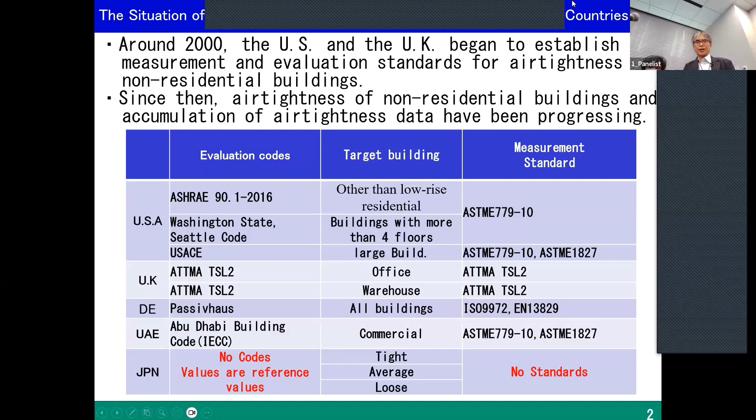Around 2000, the US and the UK began to establish measurement and evaluation standards for airtightness in non-residential buildings. Since then, airtightness of non-residential buildings and the accumulation of airtightness data have been progressing. In Japan, airtightness of high-rise buildings was measured in the 1980s, and reference values for airtightness were presented. However, no progress has been made since then.

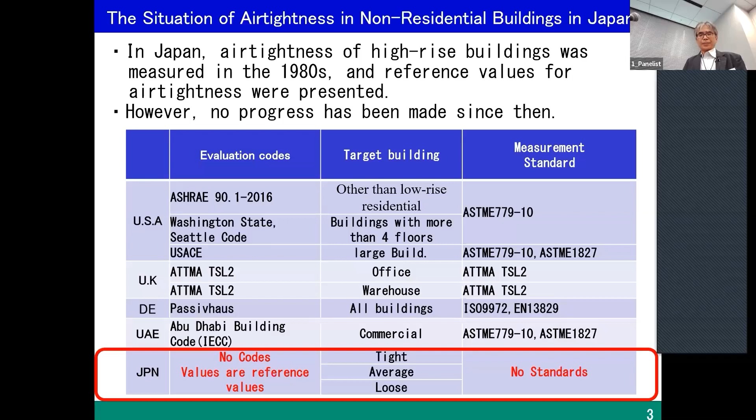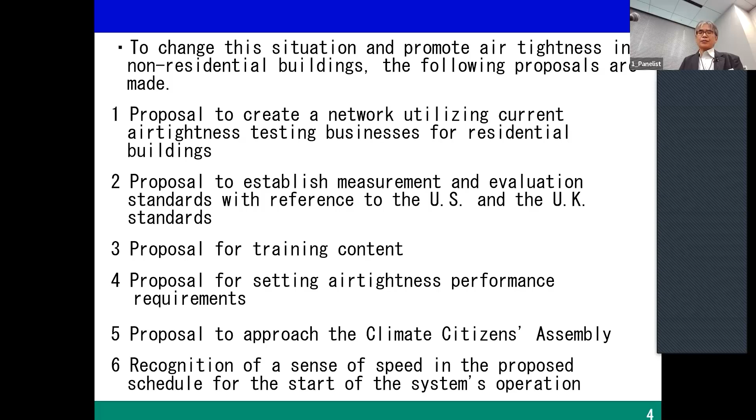To change this situation and promote airtightness in non-residential buildings, the following proposals are made. First, a proposal to create a network utilizing current airtightness testing businesses for residential buildings. Second, a proposal to establish measurement and evaluation standards with reference to the UK and US standards. Third, a proposal for training content. Fourth, a proposal for setting airtightness performance requirements. Fifth, a proposal to approach the Climate Citizens' Assembly. Sixth, recognition of sense of speed in the proposed schedule for the start of the system's operation.

First, I explain the proposal to create a network utilizing current airtightness testing businesses for residential buildings. In Japan, IBECs is an association that provides training, testing, and certification for airtightness testing of residential buildings. IBECs is an organization affiliated with the Ministry of Land, Infrastructure, Transport, and Tourism. Business operators are registered after training and passing the JIS A2201 airtightness performance test method for houses using a blower door course. About 1,100 business offices are registered nationwide.

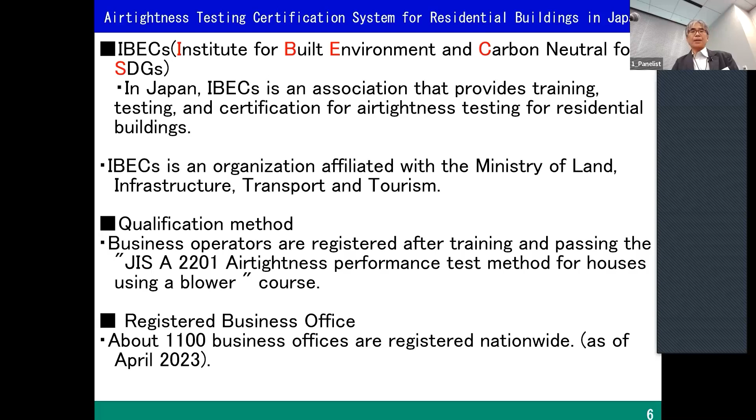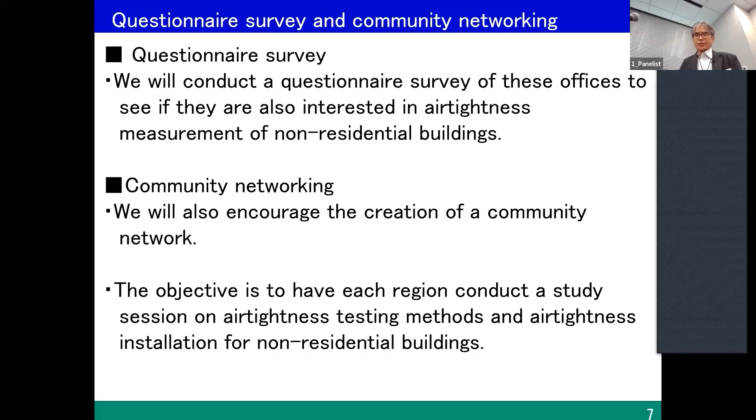We will conduct a questionnaire survey of these offices to see if they are also interested in airtightness measurement of non-residential buildings. We will also encourage the creation of a community network. The objective is to have each region conduct a study session on airtightness testing method and airtightness installation for non-residential buildings, and to have them take on the role of spreading information to local residents. In addition, since airtightness testing equipment is very expensive for large buildings, it is necessary to consider a system in which multiple businesses in a region can take measurements together.

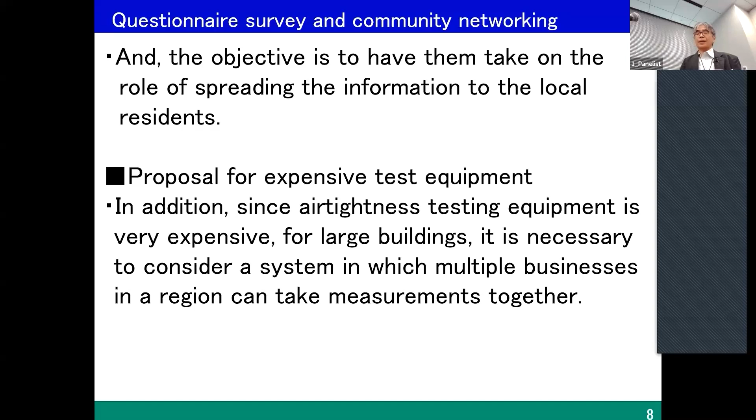Second, I explain the proposal to establish measurement and evaluation standards with reference to the US and UK standards. In the US, ASTM standards have been developed for a variety of airtightness-related content. The 16 standards listed in the table below cover areas of field and laboratory airtightness test methods, materials, and commissioning.

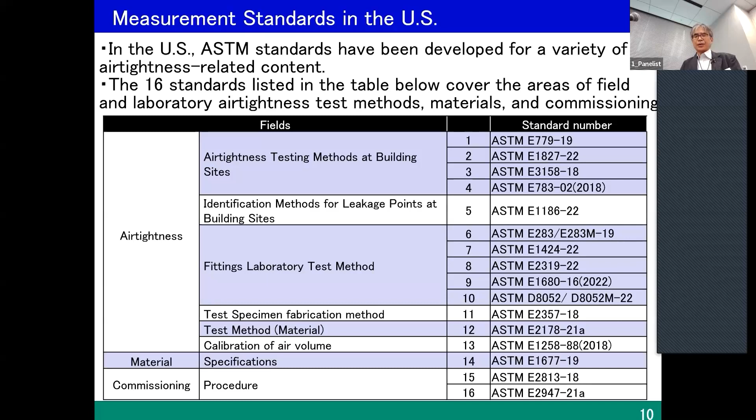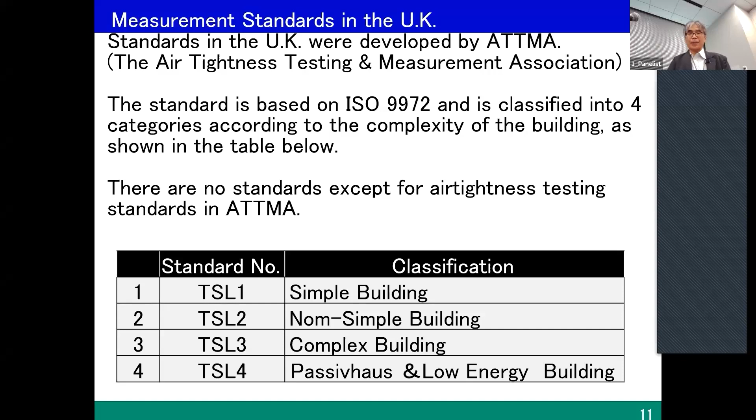In Japan, there are no standards for airtightness testing of non-residential buildings at present. The JIS A2201 is a modified version of ISO 9972 for Japanese residential buildings. The A1516 is a laboratory airtightness test method for fittings. The B9330 is the standard for calibration method for general fan airflow.

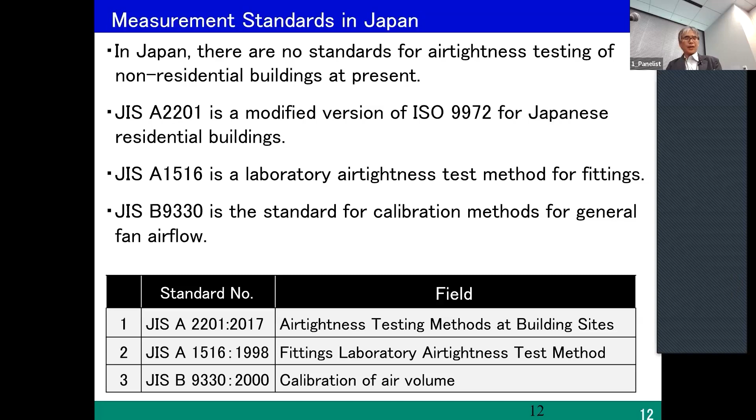In Japan, there is a need to establish measurement and evaluation standards as soon as possible. In order to respond quickly, it is acceptable to initially introduce foreign standards basically as they are; modification will be made as necessary. A candidate for standards would be ATTMA, which is simpler and explains specific procedures. ATTMA is based on ISO 9972, which is the same as JIS A2201. The ATTMA evaluation standards are defined for each building type.

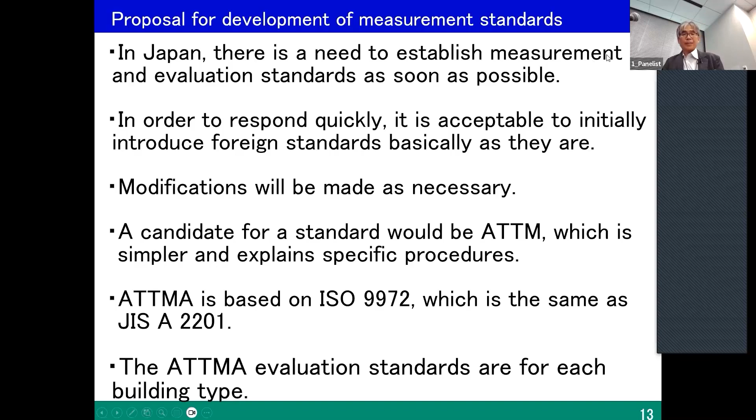In Japan, there is currently no accumulated data, so the same evaluation standards should be adopted as in the US. Standards for materials and commissioning should be supplemented with those of ASTM. The set pressure should be set from 50 Pascal to 75 Pascal in a stepwise manner, taking into consideration the number of test equipment required.

The USACE 2012 wind-unaffected method should be adopted. For the purpose of dissemination, a pattern in which the ventilation openings are not closed should be adopted as the basis in order to reduce labor and cost.

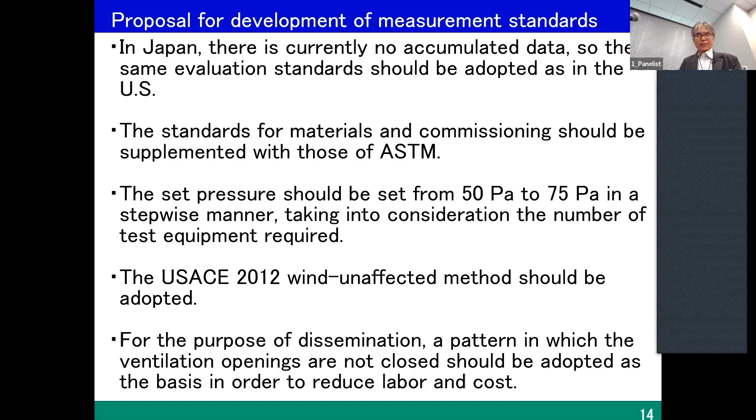Next, I explain airtightness class for fittings. Japanese fitting standards JIS A1516 and ASHRAE IES standards for airtightness performance are compared. Japanese standards are classified as A1 to A4. The standards are A2 or lower for general buildings and A3 for soundproofing, thermal insulation, and dustproofing buildings.

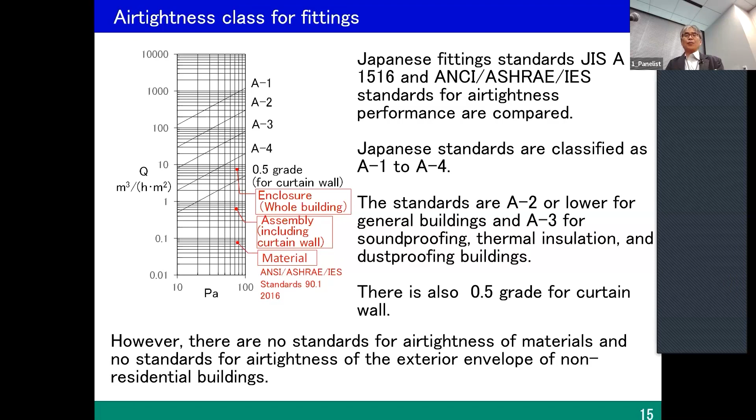There is also 0.5 grade for curtain wall. However, there are no standards for airtightness of materials and no standards for airtightness of exterior envelope of non-residential buildings. The ASHRAE IES standards are stratified into 3 categories. The standards for those assemblies have higher airtightness performance than the Japanese standards for fittings and curtain wall. It is considered necessary to reconsider the Japanese standard for fittings and curtain wall.

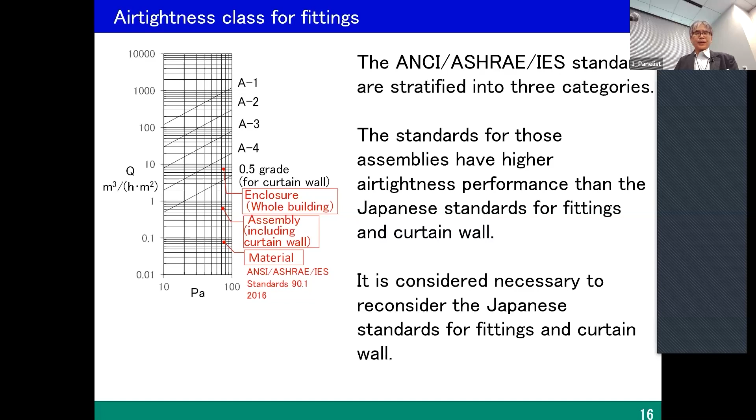Third, I explain proposal to training content. In Japan, IBECS conducts airtightness testing courses. This course is targeted at residential buildings, and there is no course for non-residential buildings. The length of the course is about 3 hours. Currently, it is conducted online. The total cost of the course, certification, examination, and registration is about $200.

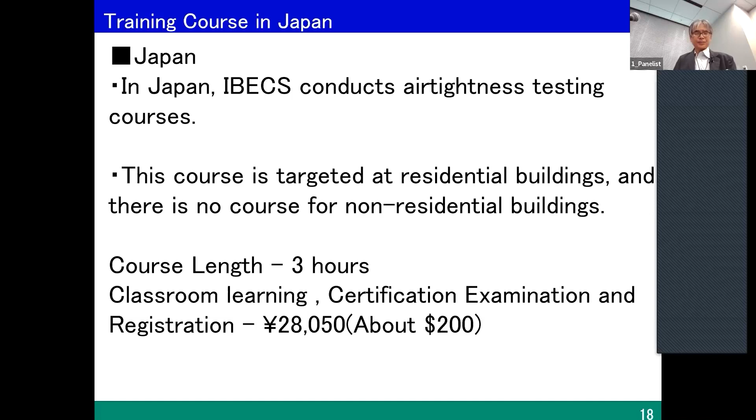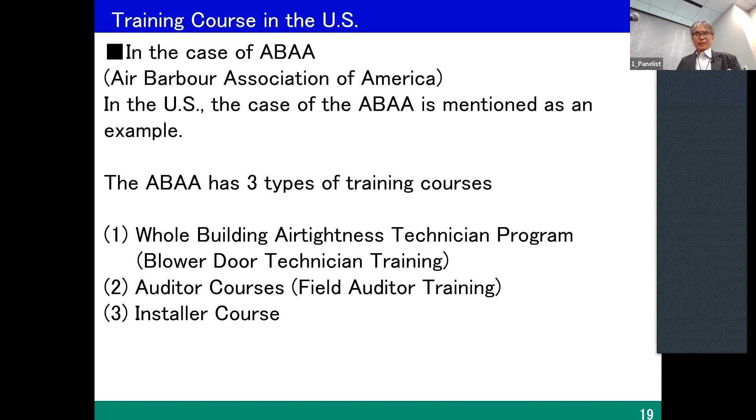In the US, the case of the ABAA is mentioned as an example. The ABAA has 3 types of training courses. The first is whole building airtightness technician program. Blower door technician program is conducted. The second is auditor courses. Field auditor training is conducted. The third is installer course. Whole building airtightness technician program is a comprehensive training program covering ASTM, CGSB, ISO standards, and USACE test method.

The course length is 5 days, consisting of 2 days of conceptual training, 2 days of hand-on training, and 1 day of performing a test. The training course fee is about $2,500 to $2,900.

The role of the field auditor is performing quality assurance audits of air barrier assemblies on new commercial and institutional construction projects during installation. Course length is 2.5 days. The total fees are about $1,200 to $1,500.

There are 2 installer courses. One is self-adhere fluid applied installer training course. The other is spray polyurethane foam and self-adhered installer training course. The course length is 2.5 days. The total fee are about $1,500 to $2,000.

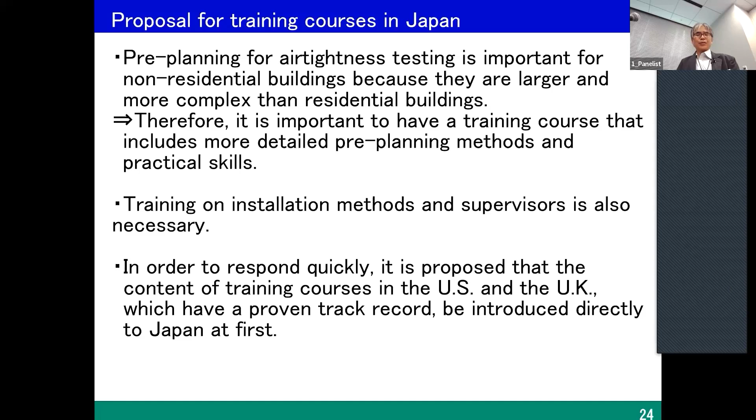In order to respond quickly, it is proposed the content of training courses in the US and the UK, which have proven track record, be introduced directly to Japan at first. In order to increase the number of qualified personnel, subsidies for acquisition of qualification are also proposed. In addition, subsidies for the purchases of expensive testing equipment are also proposed.

Fourth, I explain proposal for setting airtightness performance requirements. In this study, new buildings in different jurisdictions with mandatory airtightness requirements were compared to new buildings without airtightness testing requirements. The results showed that buildings built with the intent to meet the performance requirements for airtightness achieved the target values. New buildings built without the performance requirements were generally shown to be less airtight.

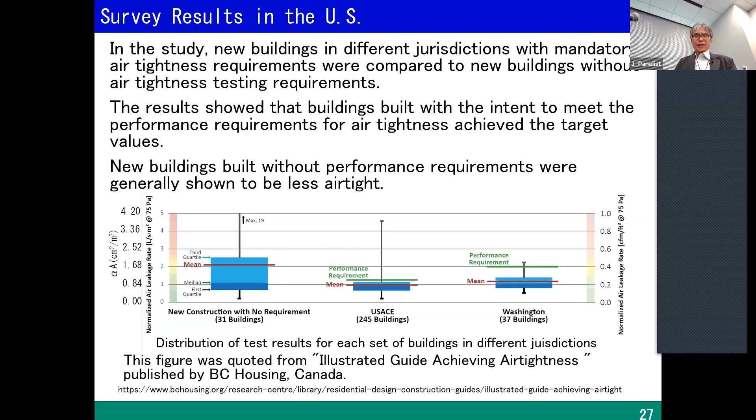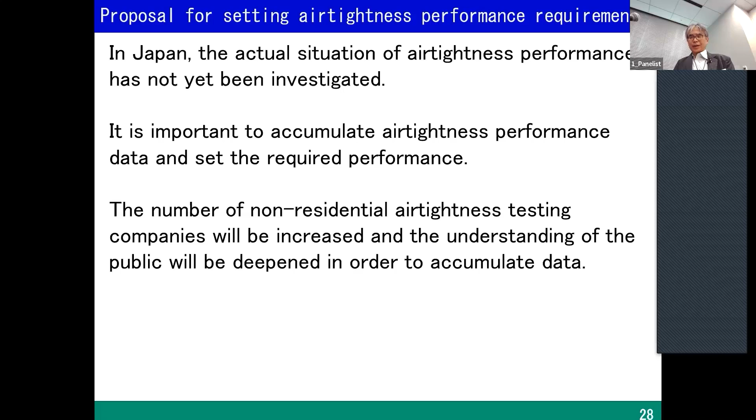In Japan, the actual situation of airtightness performance has not yet been investigated. It is important to accumulate airtightness performance data and set the required performance. The number of non-residential building airtightness testing companies will be increased. The understanding of the public will be deepened in order to accumulate data.

Fifth, proposal to approach the climate citizens assembly. Climate citizens assemblies were held at a national political level in France and the UK in 2019 to 2020. This attempt is also spreading to local governments. In Japan, the first one was held in Sapporo in 2020.

Citizens spend weeks or months receiving information from various experts, deliberating and making recommendations to the national and local governments. The national and local governments will make use of the recommendations in their policies.

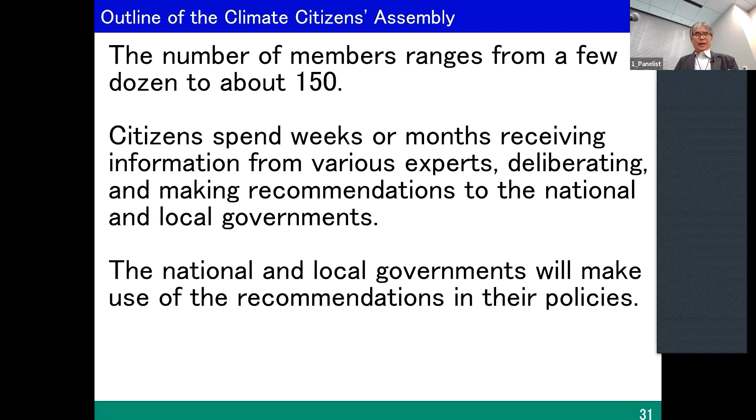At the 2020 Sapporo Citizen Assembly, participants were asked to complete a questionnaire regarding their visions for their future lives. An analysis was conducted on the results using the strength of support and the scattering of opinions as indicators. Improvement of residential thermal insulation and spread of energy efficient buildings are strongly supported, and there was little scattering in opinions. However,

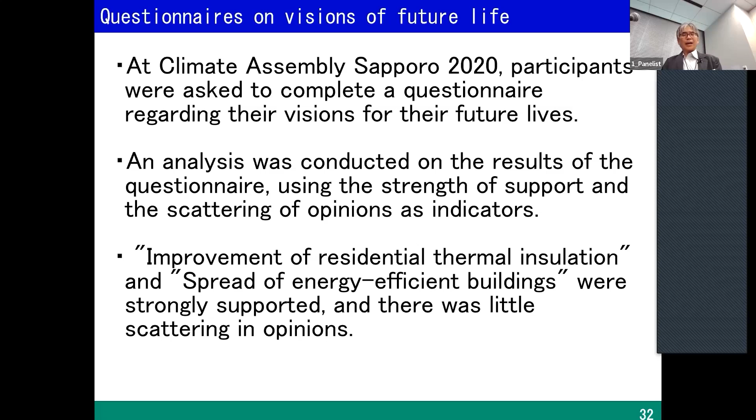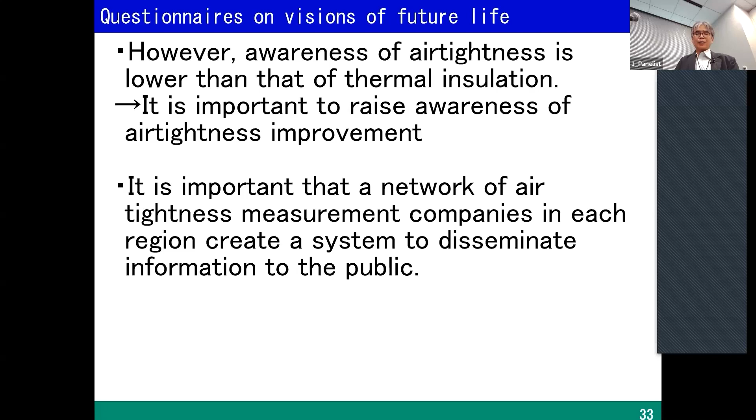awareness of airtightness is lower than that of thermal insulation. It is important to raise awareness of airtightness improvement. It is important that a network of airtightness measurement companies in each region create a system to disseminate information to the public.

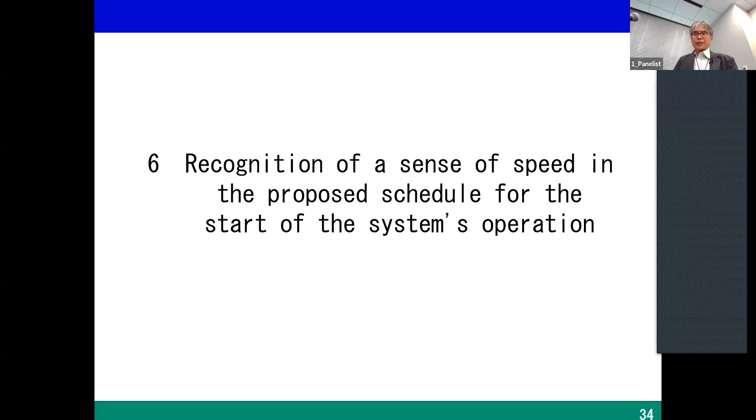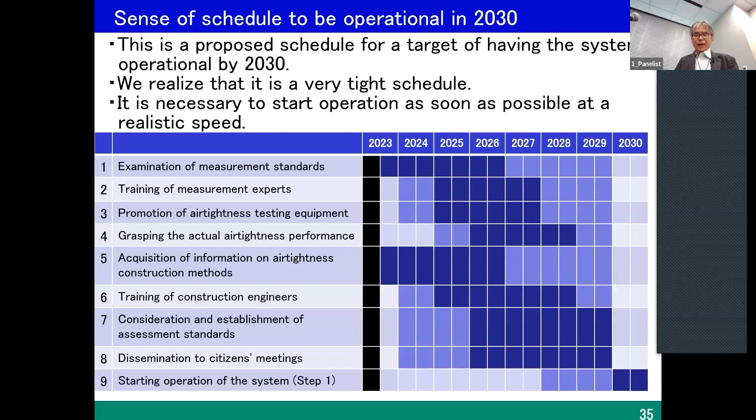Sixth, I explain recognition of a sense of speed in the proposal schedule for the start of the system's operation. This is the proposed schedule for the target of having the system operational by 2030, we realize that it is a very tight schedule. It is necessary to start operation as soon as possible at a realistic speed. Thank you for your attention.